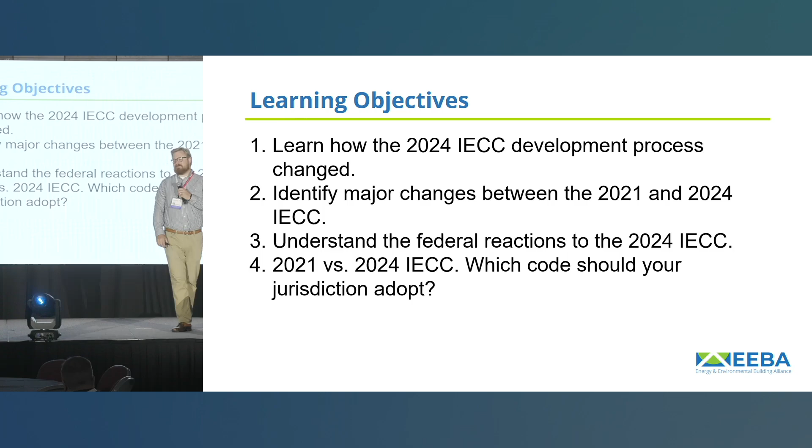It is so exciting. So key things we're going to be talking about: how the 2024 development process changed from previous years. There was a big change after the outcome of the 2021. We'll talk about that, and we'll talk through some of the major changes, not all of them, but some of the big ones for the 2024 IECC compared to the 2021.

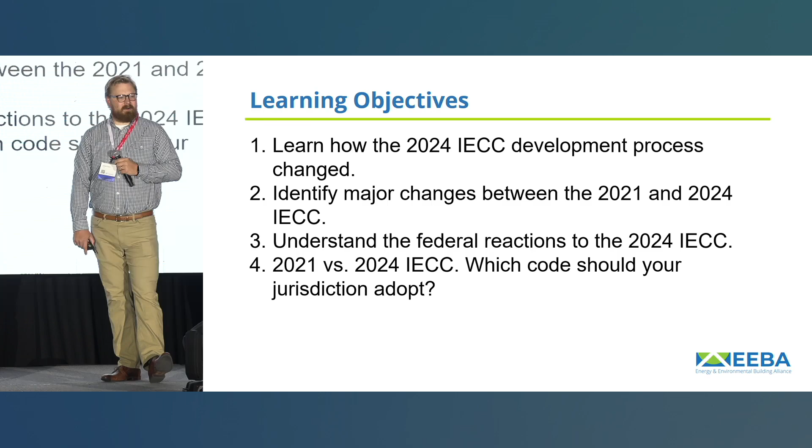And then we'll talk about some of the federal reactions to the 2024. How are programs like USDA, HUD, VA, and IRA funding reacting to the 2024? And then we're going to finish up with 2021 versus 2024. And I say versus, it's not really a versus, but it is trying to understand what's going to be best for your jurisdiction. What do you think you should be pushing for locally? Go from there.

So the 2024 is very different in a lot of ways from the 2021. One of the key changes is how it was developed. This is, in my opinion, a big pendulum swing from what happened at the end of the 2021 development process.

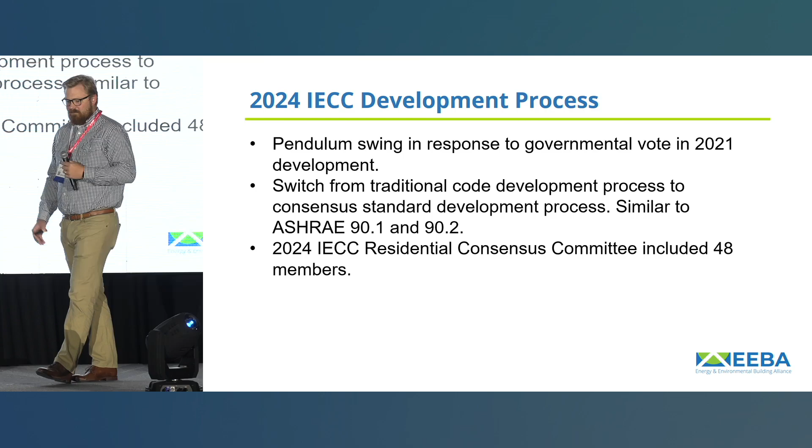This is really switching from the traditional governmental approach, where there's 2-minute testimony on code cycle or code proposals and back and forth in front of the committee, to a more consensus development standard. And it's important to note this is the same way that ASHRAE 90.1 and 90.2 are developed. So it's not that unusual for a code to be developed this way.

So in the 2024 cycle, there were 48 members on the consensus committee, and I think over 150 on the appropriate subcommittees related to that. I don't know, Robbie, were you on a subcommittee? Yeah, I was on the existing home chapter subcommittee.

Fantastic. And just to add to that real quick, in the code world, it was a pretty big change, even though it was very similar to ASHRAE standards and whatnot. But in the normal code world, you do development through the code hearings, and the code hearings, as Nathan was saying, is this 2-minute process where you put in a proposal and then you have 2 minutes to speak to it. Then people have 2 minutes to rebut, and then you can rebut once there, and you kind of go back and forth.

And it's basically up or down pretty much after that 2 minutes. It's a little bit longer process, but the consensus process is good and bad in certain ways. One is that from the bad side, it's just super time consuming versus kind of a dedicated 2-week process at the code hearings. The consensus process was going 6 months or longer.

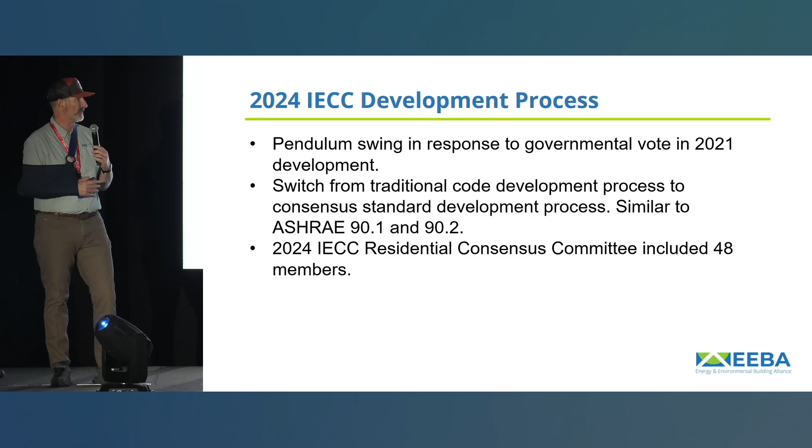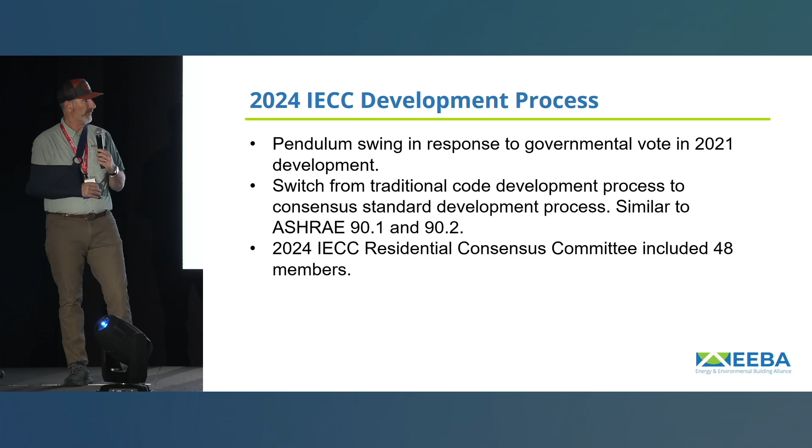With hours during the week. I mean, it was probably 8 to 16 hours a week you're dedicating to that there. So, but that was also good in some ways because proposals didn't necessarily die at the podium. They could be massaged a little bit during the process.

Yeah, absolutely. So, looking at how that process works, we're going to go high level, not into all of the details of this, but really people apply to be on a consensus committee or an appropriate subcommittee. I think there were 5 subcommittees in this last cycle. I expect there to be about the same number in this one.

During that time, ICC says, okay, start submitting proposals. We'll start gathering those together, and then that goes to subcommittees. Subcommittees do a lot of the work for the code development. They will review all of the proposals, talk them through, decide if they need modifications or changes, and then they will make recommendations to the full consensus committee.

After that, the consensus committee will review the recommendations and vote on changes. Sometimes those votes are...

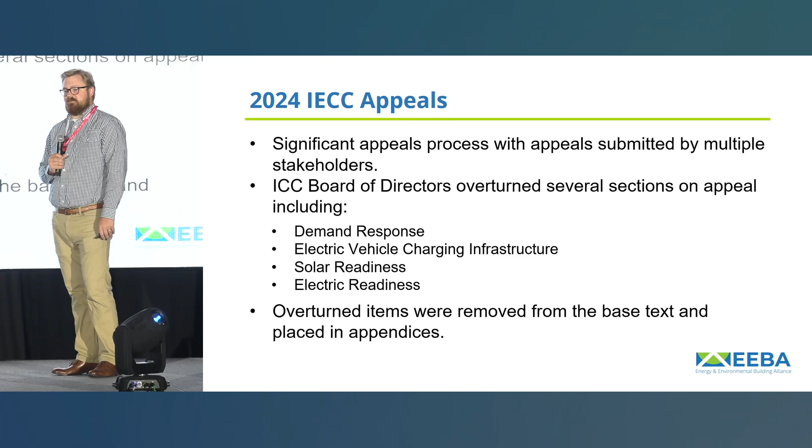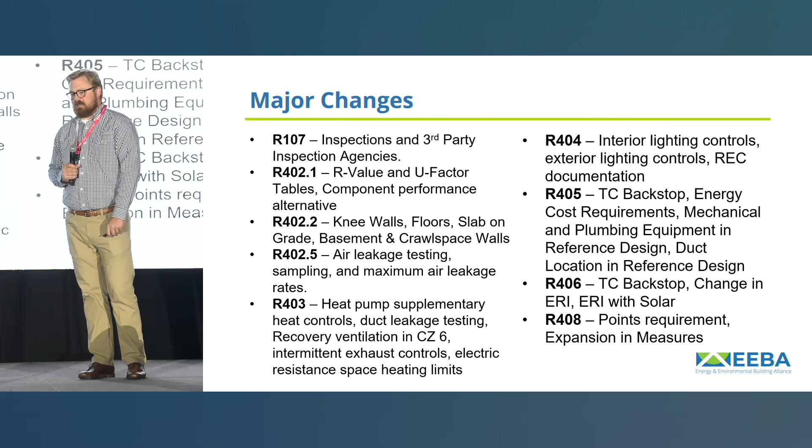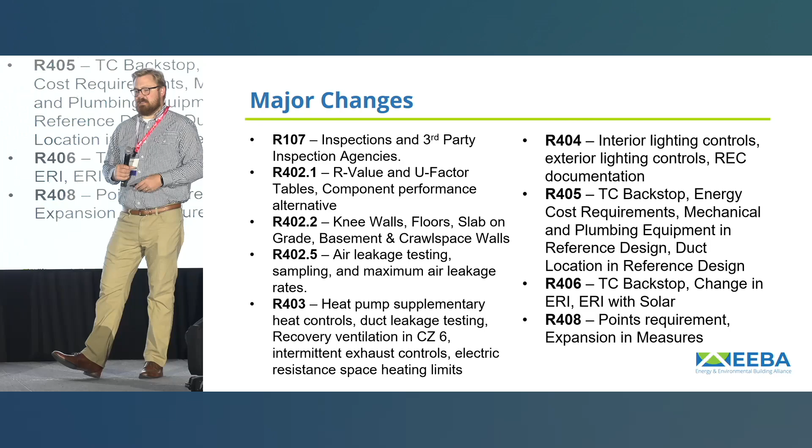So I think that's enough on the cycle and appeals. Let's talk about the changes—this is probably what most of you came here to learn about. We're going to cover a lot of the major changes, but not all of them. The 2024 code is publicly available for free online, and I strongly recommend, if your municipality is looking to adopt it, go read it and understand it a bit more. There are plenty of resources from NAHB, the Department of Energy, and other parties about these changes and the opportunities under this new code. We're going to cover some of the high-level ones. We won't be looking at things like existing buildings—I think most of you are new construction, so we'll stick to new construction and go from there.

Robbie, you want to handle these? Yeah, so the first things that changed were in the administrative chapter. A lot of jurisdictions don't actually adopt the administrative chapter, but there are some really interesting and good things in it that municipalities should consider.

The first one is with regards to inspections. If you look at the codes up until the 2024, you'll see that inspections have been framed a little differently in terms of what you need to look at from an energy perspective—like ensuring insulation is not only installed to the R value, but actually installed properly so it works and functions. So they did additional work on that section of inspections to focus more on energy, air barriers, and insulation installation.

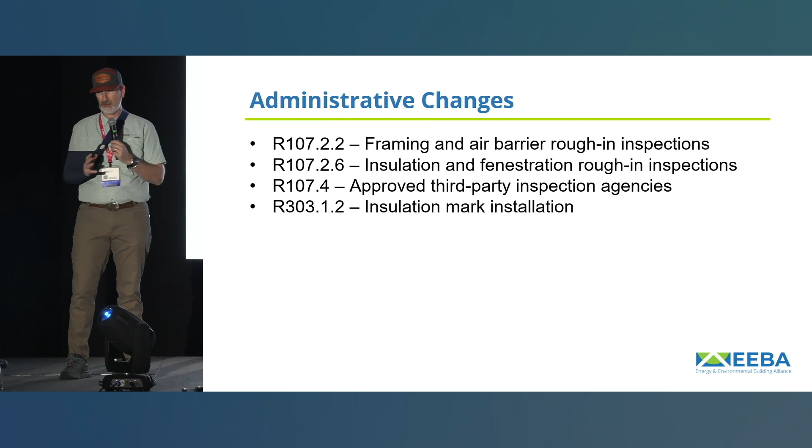Approved third-party inspection agencies is something that's been passionate for me, and I was part of the group that worked hard to get revisions in the 2024 to better clarify the relationship between the code official and an approved third-party inspection agency—giving that agency a scope of work, but also some authority to actually fail an inspection if they're being used for that. It also better clarifies the financial relationship, so it's clear the third party has the authority to work in that jurisdiction, but the jurisdiction also has the ability to say you can't work here and provide documentation for code approval if they feel there's something that's compromised your integrity and independence from the builder utilizing you.

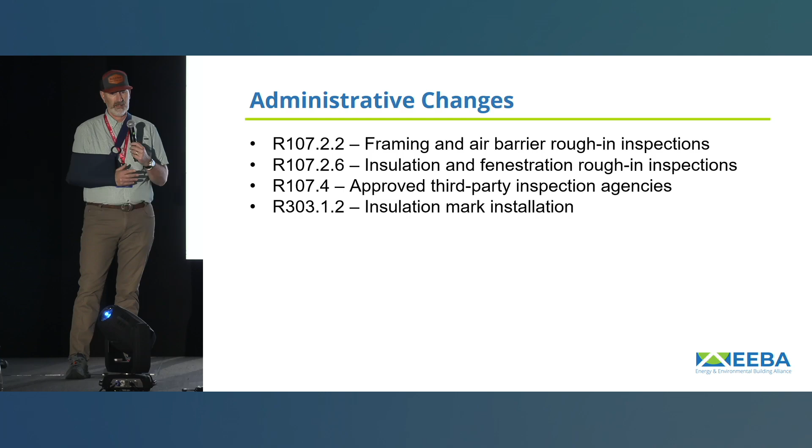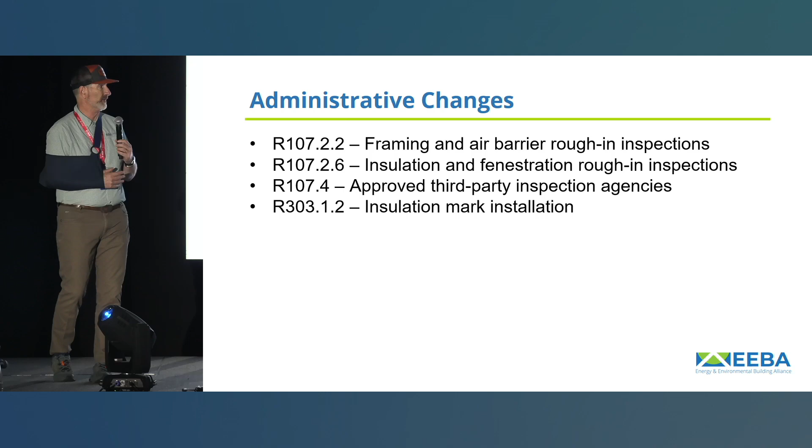The installation mark change—I think this really happened more in the 2021 cycle—addresses the problem with insulation installed that doesn't have an R value mark on it. We really have no idea what the R value is; we can make assumptions based on the density of the blow or the chemical reaction that happens, but that's it. So we're now asking that the insulator certify the R value installed and provide a certification certificate immediately after installation of the material. The hope, in the vagary of code language, is that we get better quality assurance from the actual installer at the time of installation, and that we can rely on the R values they're certifying. Thanks, Robbie.

Next big change—sorry, this is small.

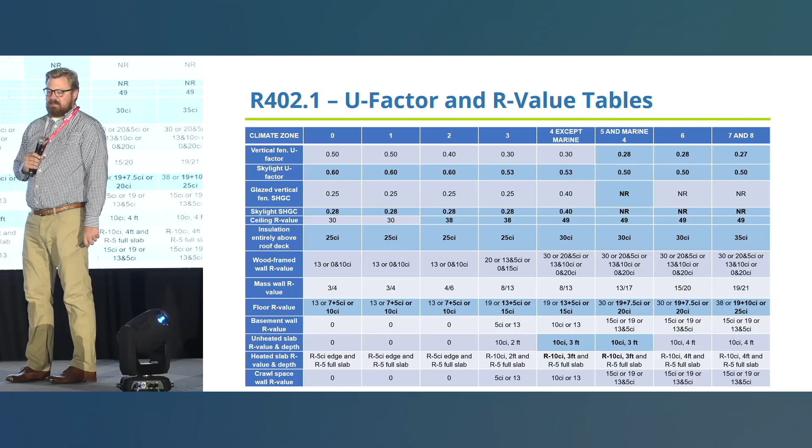There were some pretty significant changes throughout the R value tables and the U factor tables. Some of the key changes in colder climates, there was a ramping down of U factors for windows. Nothing that's going to push a builder into a triple pane, but requiring some better window technology. There was also a really great decrease in skylight U factors.

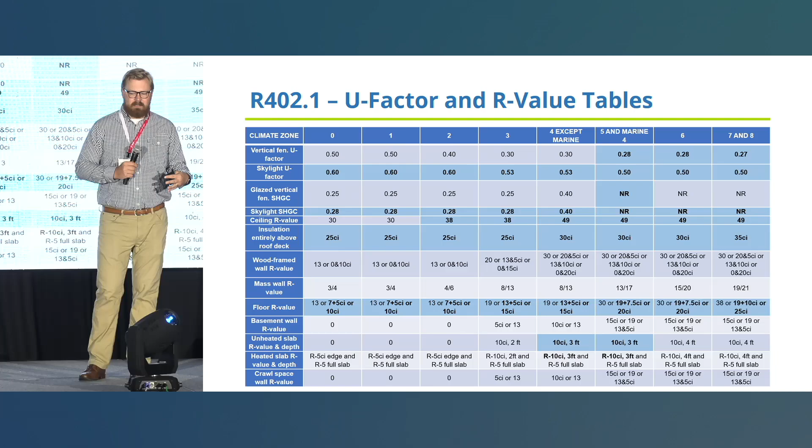Another key change is with ceiling R values. In 2021, there was a push up in climate zones 2 and 3 to R49, and then 4 through 8 went up to R60. That came back down as part of that compromise, so that is a significant change.

Another key thing that I think is great, and we're trying to recognize more about low-rise multifamily that is covered under the residential provisions of the IECC, is what happens when we have insulation entirely above deck. These values were added to this table, really trying to bring some better guidance for those low-rise buildings.

And then some of the last changes, floor R values didn't really change, but there was some flexibility added into what pathway you can choose. You can pick a cavity-only insulation option, you can pick a hybrid where you've got a little bit of cavity insulation and some continuous, or you can pick an all-continuous option. That was added throughout all of the climate zones.

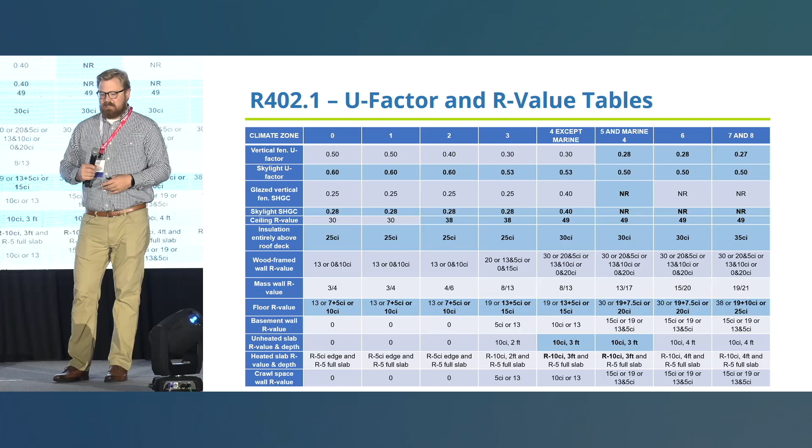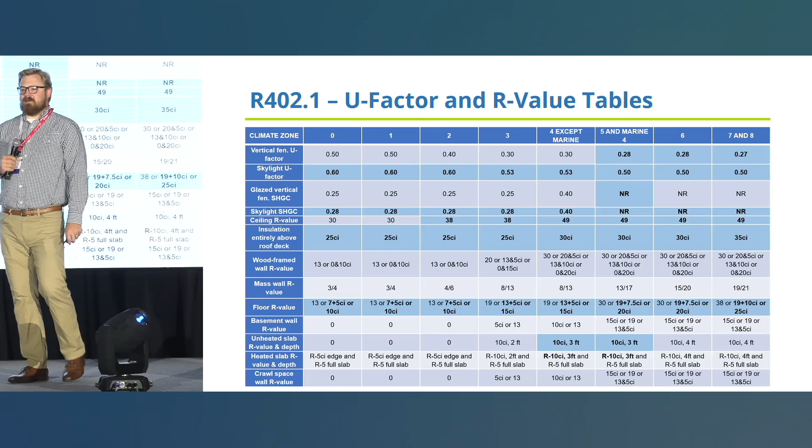And then another reduction was in the slab edge insulation. So climate zones 4 and 5, taking that from R10 at 4 feet below grade to R10 at 3 feet below grade. Again, this is our prescriptive values. I'm going to assume that most of the people in the room are following a performance pathway, so you're not always looking at those prescriptive values, but this will inform the reference home that you're comparing against.

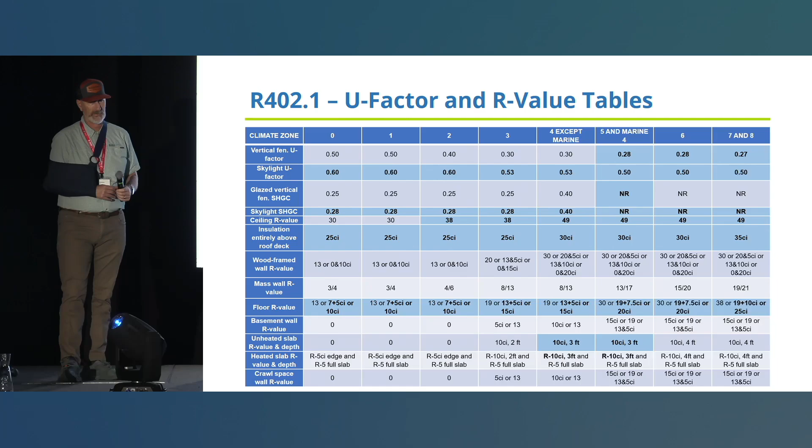The other big change, obviously, was in the structure of the table, which we should point out too, is that they inverted the X-Y axis there, so that's why it might look a little strange to you, but it ultimately makes it easier to read. I believe this is also more consistent with the commercial sections of the code, which had taken that switch previously, so this just brings some better clarity.

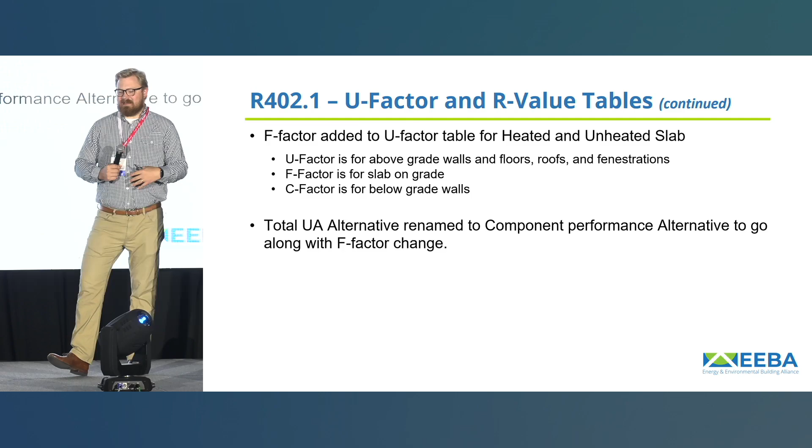Another item that you will see throughout the code is F factors are in the code now. Basically, there's U factors, F factors, and C factors. U factors are for above grade walls, but we had been using them for slab edge insulation. The change is that really F factor is the appropriate heat loss, heat transmission factor for slab on grade, so that was changed in the U factor table for the slab edge and the below slab insulation values.

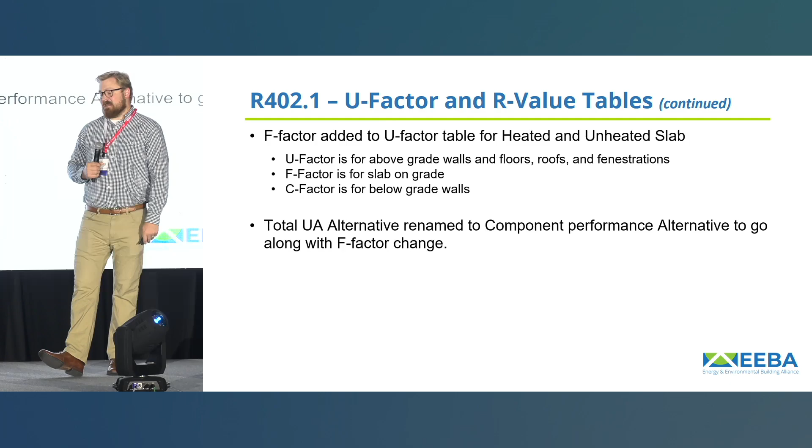And there was actually an appendix brought in that gives a lot of great information about some of these factors. Just as a reminder, U factor, F factor, and C factor are talking about basically the resistance of heat flow through an assembly of things, versus R value, which is the actual component there.

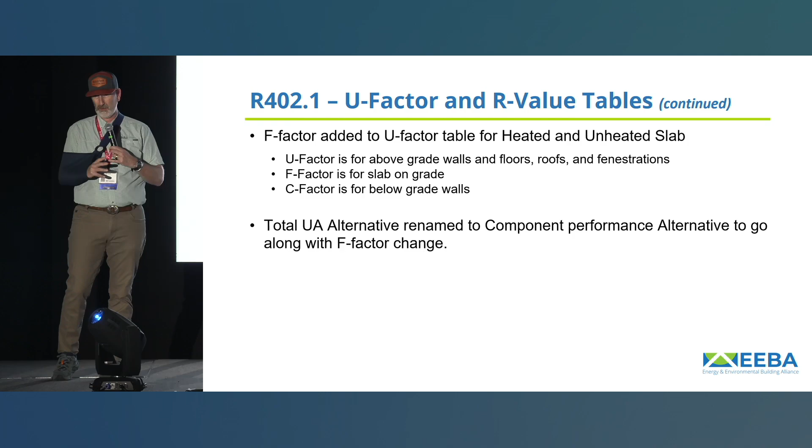This is super important because you might have noticed that if you use the REScheck software for the area-weighted U-value approach, PNNL stopped you in 2021 from being able to do slab edge trade-offs, because there was no value, no assembly value there that they could use in the U-factor table, since all the U-factors are basically populating the software modeling there. Now that ability to get more flexibility, whenever you use even a limited energy model versus the more sophisticated energy models, has been brought back into the code.

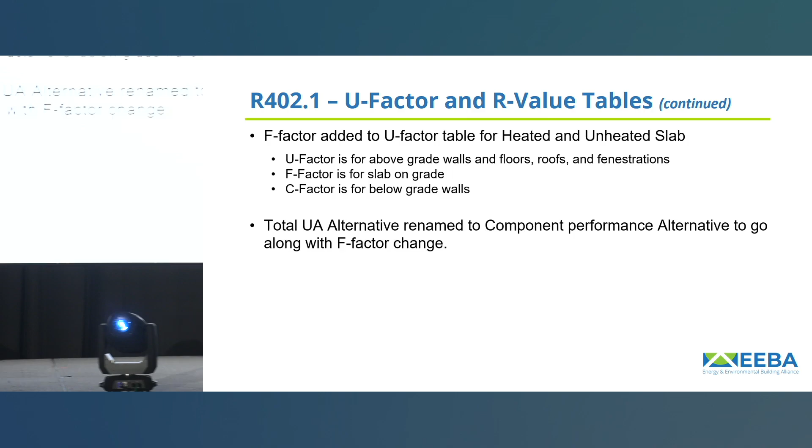And with the change and addition of F-factors, they had to change the name of the UA alternative. Since we have F-factors in there, calling it a UA is not appropriate. So the name was changed to the Component Performance Alternative, or TC, for total conductance. It's now referred to throughout the code as TC instead of UA, so you may see us talk about TC on future slides. That's what we were talking about.

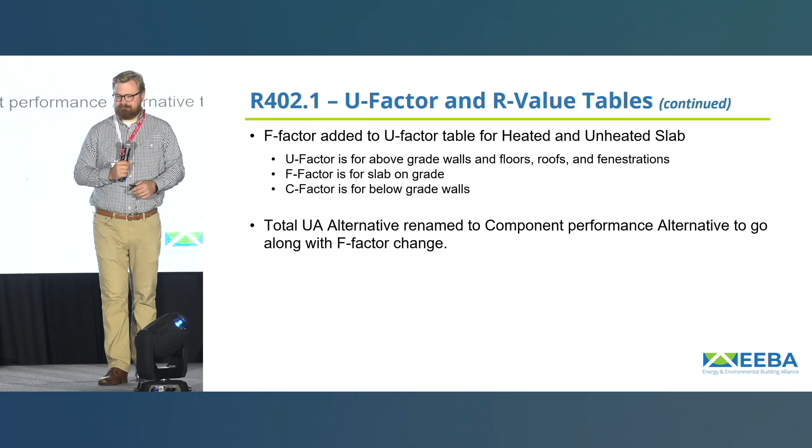Other changes that happened were changes in specific insulation requirements. It was always implied that attic knee walls were supposed to be installed like typical above-grade walls, but it wasn't really confirmed. That was a change to verify and provide that requirement, that attic knee walls need to be installed like above-grade walls.

Another change throughout that section is that for slabs, crawl space walls, and basements, there was specific language put in saying you install it this way, or you install it in accordance with your energy model—in accordance with the proposed design or rated design as applicable. So if you're unable to get insulation all the way up to the top of the slab edge, you can model it and take the hit in the model, and that meets the requirements.

There are also provisions for basement walls if you're not installing insulation all the way from the top of the basement wall to the bottom. This is something we might see with some code-minimum production builders. That is going to be allowed as long as you're performing or marking that in your model appropriately. So that's a big change.

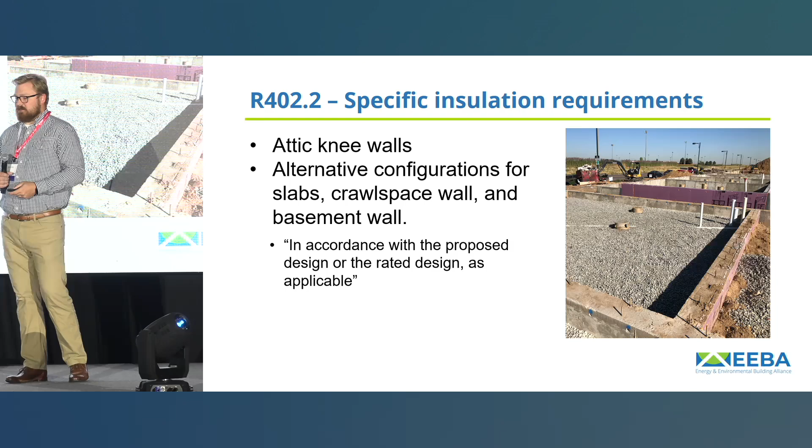I think the big thing to recognize with regards to the specific insulation requirements is that they're requirements for how you install a product or an insulation. Sometimes there's R-value and U-value mixed in, with the ability to do trade-offs utilizing the prescriptive R-value table, but mostly it's about how you install things. So when you're looking at the R-value table, it doesn't say you have to put in that R-value—you have the ability to do what we call a trade-off using an approach.

But for attic knee walls, for example, we often see that an attic knee wall is framed with a 2x4 wall, while the rest of the exterior wall is framed with a 2x6 wall, and that's perfectly fine. It just means you can't use the prescriptive R-value compliance approach—you've got to move to a different approach. I think these kinds of upgrades to the code help point those types of things out a little bit better.

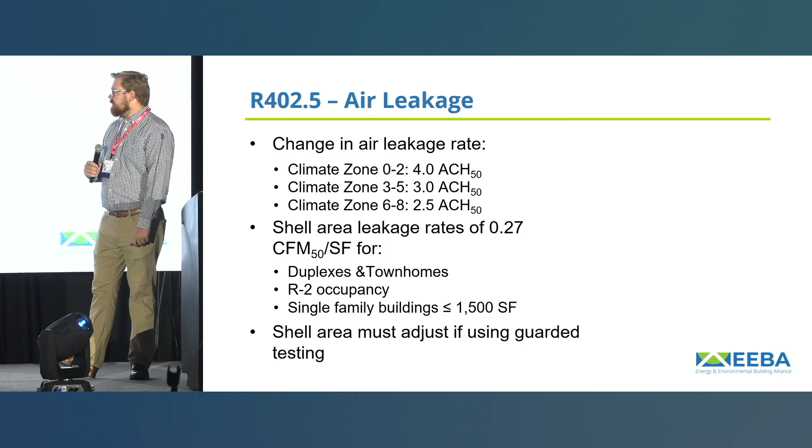Absolutely. Another major change we saw is a change in air leakage rates. For climate zones 0 through 2, it dropped from 5 ACH50 down to 4 ACH50. I think that's a very doable reduction for most buildings in those climate zones. Climate zones 3 through 5 stayed the same at 3 ACH50, but climate zones 6 through 8 dropped to 2.5 ACH50—a reduction for those colder climate zones, recognizing they have more intense heating requirements and need to be slightly tighter.

Another big change was shell area. It had been included in the 2021 code, but in some ways it wasn't well defined—how you use it, where you use it, and what your overall application of it should be. So they were very specific in rewriting that section to say how and where you use it. You can use the shell area leakage rate of 0.27 CFM for duplexes, any sort of R2 occupancy, or for single-family buildings smaller than 1,500 square feet.

They also provided clarification about guarded blower door testing, which is especially important in attached buildings. Basically, if you are using guarded testing where you may have multiple blower doors operating at the same time, that is allowed, but you need to make sure you're reducing your shell area appropriately. If you're trying to equalize units on either side of a townhome, that's allowed, but you need to pull that shell area out so you're only looking at exterior walls at that point.

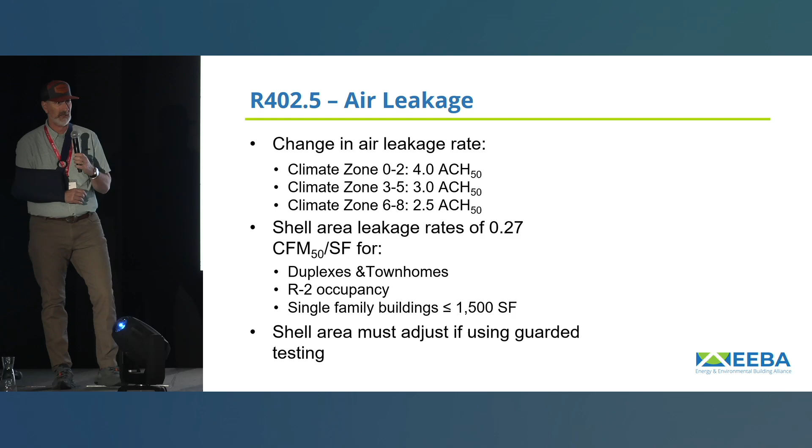In the 2024 code, they made it much more clear that there are air leakage allowances for the four different compliance approaches, so you still have, in essence, this backstop for air leakage in the performance approaches, and then you have these listed air leakage rates per climate zone if you choose to use the prescriptive compliance approach.

There were also significant changes throughout R403. This is talking about HVAC systems and plumbing systems.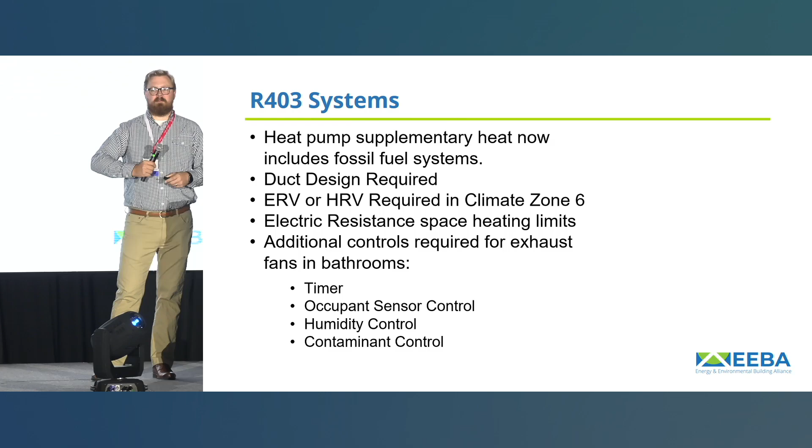Some of the high-level changes: the heat pump supplementary heat options previously only referred to electric resistance heating. It now includes references to fossil fuel systems. So if you've got a dual fuel system, it's being very clear on when that furnace or other fossil fuel system should kick in, and setting some really key limits around that.

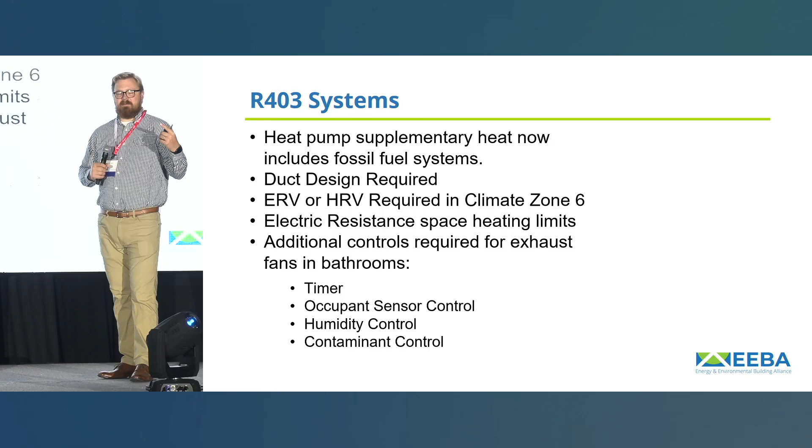Also included in previous codes, we've seen a requirement to complete a Manual J heat load calc - everybody should know that - and a Manual S to confirm that our equipment is sized appropriately to meet the load. But a big change we're now seeing is the inclusion of Manual D, having a duct design as part of your overall code compliance package, so that your system can actually distribute the heat appropriately and handle this.

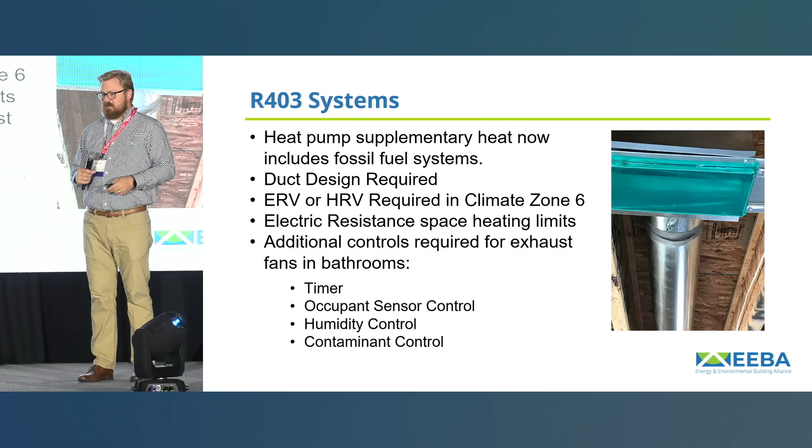Another big change - oh, and I have pictures for all of these, sorry. Sorry, this is one of my joke pictures.

We started installing ERVs at one point, and I come in and see this nice control wire, and I'm looking at it, and I see ARV, and I'm like, what are they talking about? They just misheard us pronounce ERV.

So ERVs are now required in Climate Zone 6. Previously, it was only required in Climate Zone 7 and 8, so that was brought down to Climate Zone 6, really expanding the area where ERVs and HRVs are going to be used.

And then two other changes: putting limits on electric resistance space heating. So saying that you can only put so much electric resistance unless you also add in a heat pump. So a big opportunity to reduce that low efficiency heating.

And then there was requirements for controls for what's listed as intermittent exhaust fans. These are fans used in bathrooms and other wet areas, but putting requirements to say they either need a timer, occupancy sensor, humidity control, or contaminant control. So go talk with some of our great sponsors here about what that would look like to implement on your fans. Robbie, anything else on this?

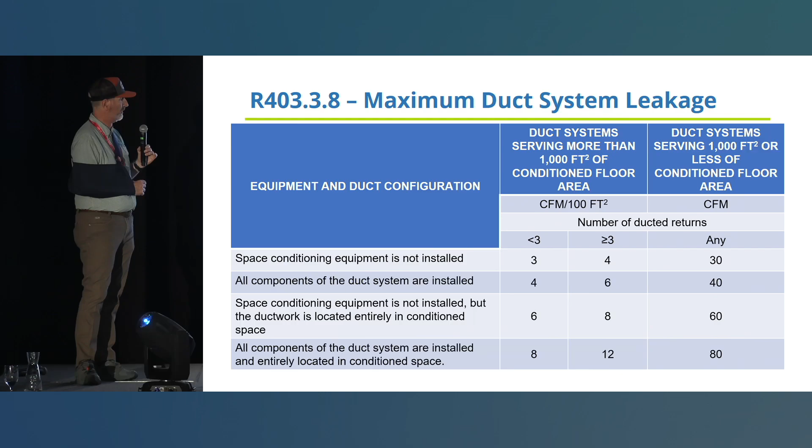I'll just add, because I'm particularly passionate about duct leakage: in the 2021 IECC, you'll see that you have to test ducts for duct leakage regardless of where the ducts are located, which is new to that code. But you do get some allowance if all the ducts are located inside the conditioned space, and those allowances have been added to this table, expanded a bit to make it more clear that yes, you still have to test the ducts regardless of where they're located, but they get tested to different leakage targets, in essence, that are listed in this table. That's new to the 2024.

I think a big piece on this table is this far column. Any of you who have done duct testing on ADUs, on apartments, on small buildings below 1,000 square feet have felt the pain of trying to hit a requirement of 4 CFM per 100 square feet when you only have 750 square feet - that gets really difficult. So they've changed this, instead of being based on the square feet of conditioned area, to just a hard target for these smaller units. I think that's going to provide some good flexibility while still keeping good stringency around all of this.

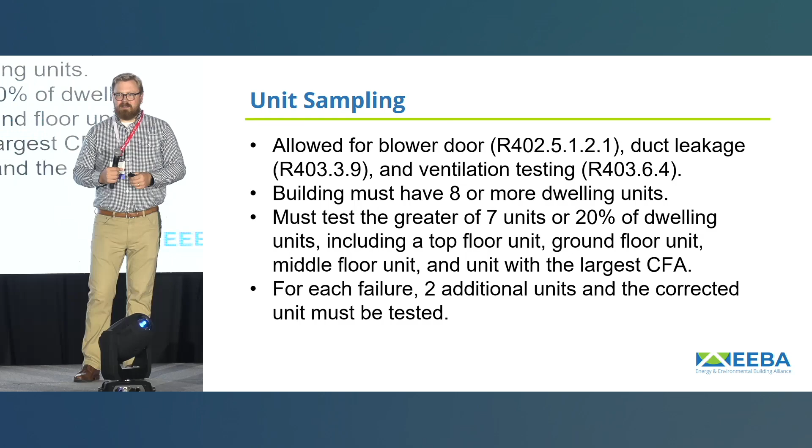Another option brought into the code - valuable for any multifamily builders in the room - is the opportunity to do unit sampling for your testing. There are three tests that have to be done on every home: blower door test, duct leakage test, and a ventilation test. What the code is allowing is for buildings with 8 units or more, you can start to look at sampling. It requires a minimum of 7 units, so if you have an 8-unit building, go ahead and test that 8th one - there's no point in not testing it. So it sets requirements on how you should test, what percentage of homes you should test, and what to do if you have a failure, like adding more units into your sample. This is consistent with some of the language RESNET has been allowing around sampling for HERS rating, and I think limiting it specifically to attached units that are larger makes more sense than allowing this in single family.

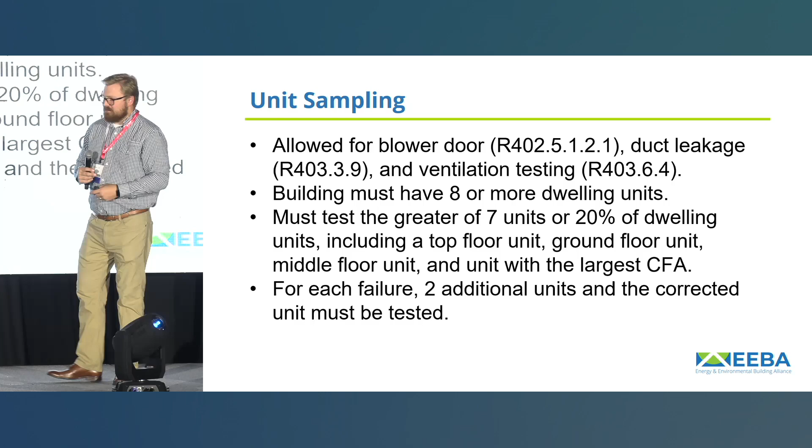I don't know if everybody's aware, but in the 2021 IECC this is when ventilation testing got into the code, or was added to the code. So you're talking about measuring flow rates for whole house controlled mechanical ventilation, spot ventilation in bathrooms, kitchens, and laundries, and also ventilation of kitchens through kitchen hoods.

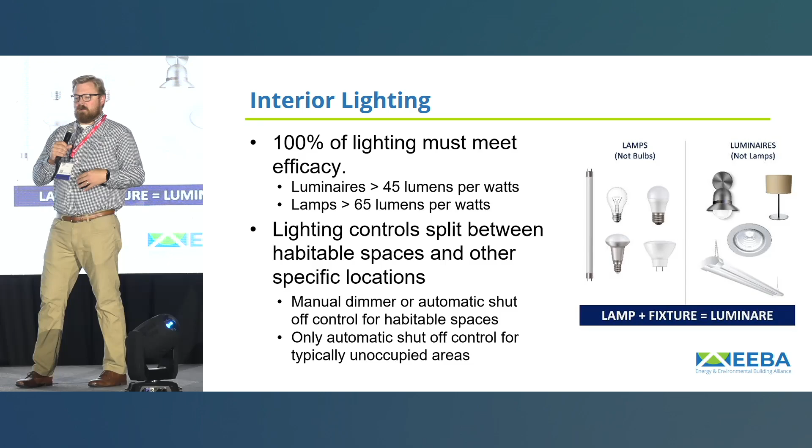So other key changes are around interior lighting, and then we'll get to the end of some of our prescriptive requirements. The code changed the language to say 100% of lighting must meet a certain efficacy. For luminaires — for the non-lighting designers in the room, that is what I would call a fixture — they have to have an efficiency of 45 lumens per watt or greater. And for lamps, what I call a bulb, but lighting designers insist they're called lamps, they have to be at an efficiency of 65 lumens per watt or greater.

There was also, in 2021, a requirement for interior lighting controls that came into the code. This was changed in 2024 to specify what types of controls should be in what locations. For most locations throughout the home, they're saying a manual dimmer or what's referred to as an automatic shut-off control — a fancy way to say an occupancy sensor that turns off when you're not in the room. A dimmer or occupancy sensor is appropriate for most spaces, but there are specific areas that may typically be unoccupied where only an automatic shut-off control is allowed. This includes a garage, laundry room, utility room, or unfinished basement — areas you may not typically go into will require these automatic shut-off controls.

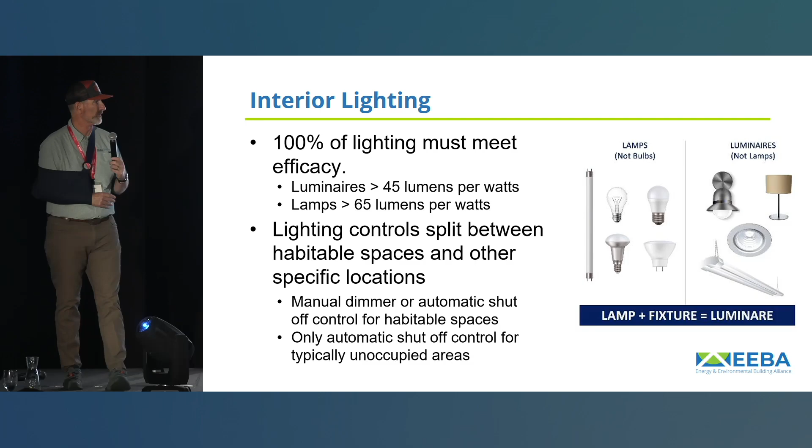Because the residential side deals with single-family homes, duplexes, townhouses, and multifamily that's 3 stories or less, this section might look a little daunting, but when you read it you have to understand what's being required for more of the multifamily, stacked multifamily, versus what's required for detached single-family houses. So it's not quite as daunting as you might think. You'll see a table that came over from the commercial section for those R2 occupancy buildings, but know that's just for multifamily — it's not a requirement for single family.

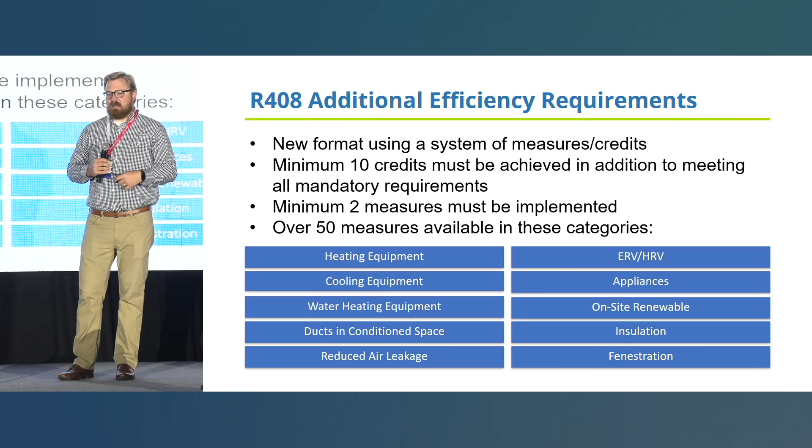And then finally, there was a big change in section R408. This came about in 2021 as an additional efficiency measure system. There were 5 measures, and you went and picked one — that was your option to do throughout the code process. This has changed pretty significantly under the 2024 code. It changed from an individual measure selection to a credit system.

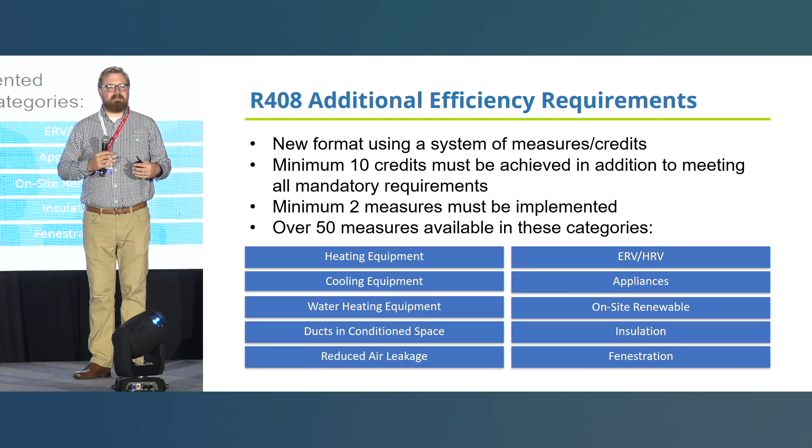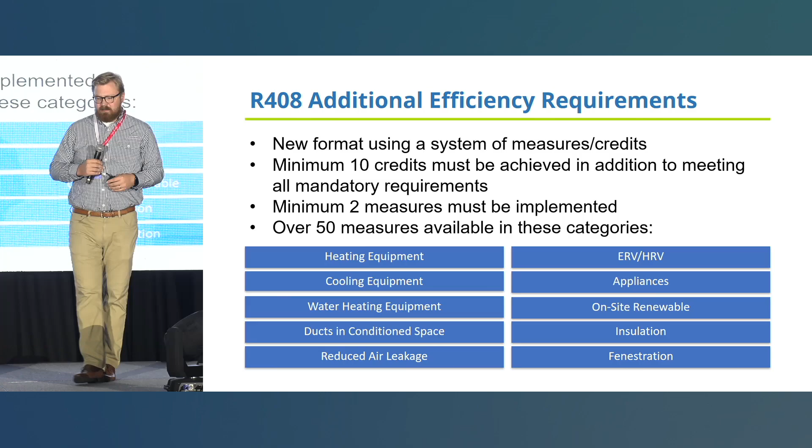So there are about 50 measures, a little over 50, that you can select from. Each of them has a different point value based on the credit, the specific measure, and the climate zone it's in — I'll show a sample of that table in a second. The requirement for most homes is you have to get a minimum of 10 credits, and that has to come from between 2 measures — so you can't just pick 1 measure, you have to pick 2 and get all of them. Some areas it looks at include your equipment, whether heating and cooling equipment or water heating, and there are a lot of opportunities around ducts in conditioned space to get significant credits. Air sealing, ventilation, and renewables are all options under the code.

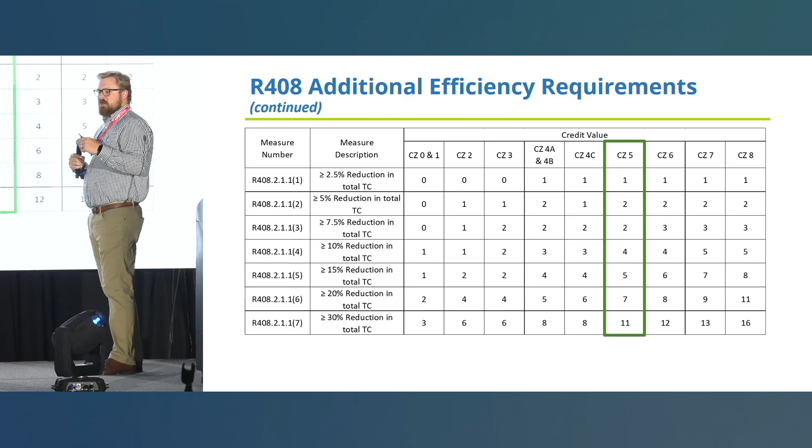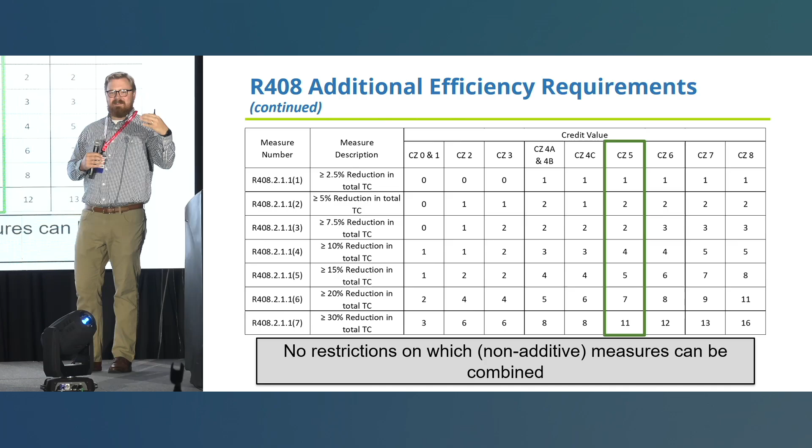This is an example — this is the very top of the table. You can see you can get different credits based on your percent reduction in total TC, which was formerly known as total UA. So you have options to get points throughout all of these, and depending on the credit, a lot of these can be combined. Some of them are not additive with each other, like these TC measures, but you can't get credit for being 2.5%, 5%, and 7.5% above code — you can only get one of those.

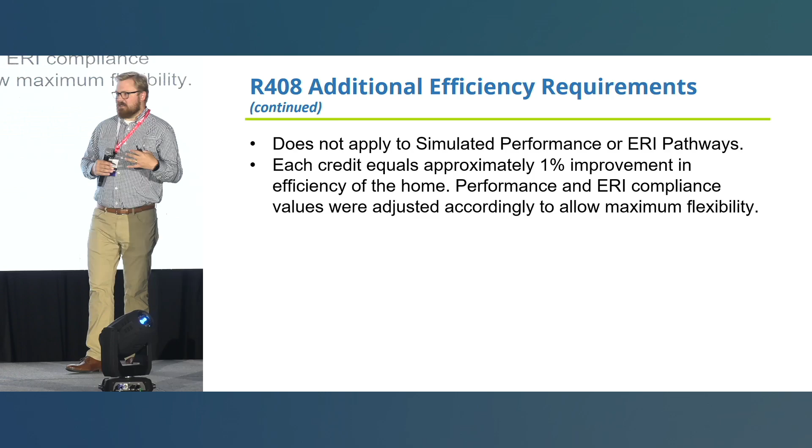The last thing to say about R408 is that this only applies to the prescriptive code section — it does not apply to the simulated performance or ERI pathways. The way this was implemented is that when you look at these credit tables, each credit is about 1% improvement in energy efficiency, with some rounding going on. That allows some comparison to the efficiency requirements in the performance and ERI paths, so those requirements were adjusted appropriately. In 2021, there was some confusion on how to implement the additional efficiency section in a modeled pathway, so this really helps that out and allows for different flexibility options under the prescriptive path, while also giving clarity for the performance pathways.

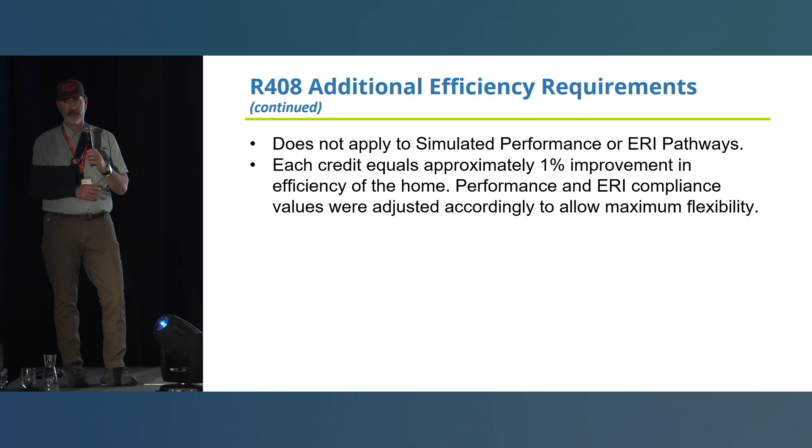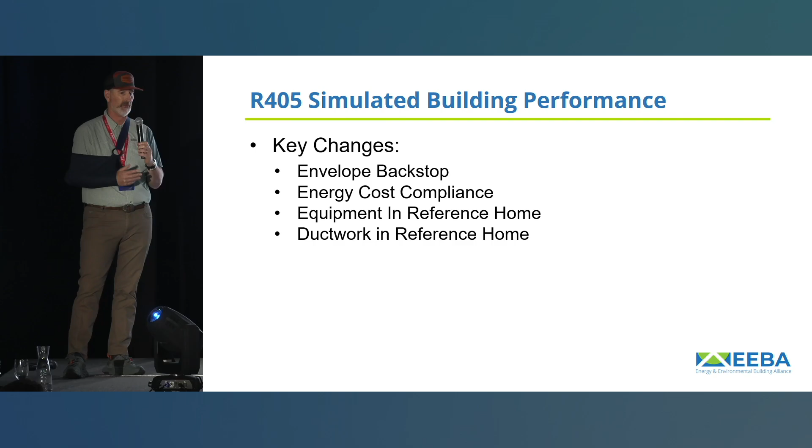And you'll see in the performance pathways that they have added these things called backstops. So in the performance path, there's an envelope backstop that ensures you have a sound building thermal envelope before you take into account renewables or other things that can swing depending on the pathway you're using.

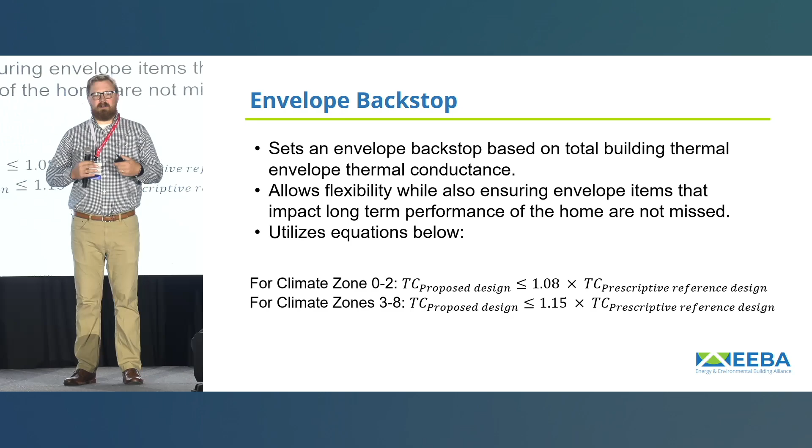Robbie mentioned backstops. Key thing is that they set a thermal backstop based on TC, the thermal conductance. So for climate zones 0 through 2, your proposed design has to be better than or equal to 1.08 times the prescriptive reference, so 8% over that. And in the colder climate zones, that's at 15%. This allows some flexibility, but also ensures these long-term durable performance aspects of the home are not going to be missed.

Real quick, I remember what I was going to say regarding the additional efficiency options and the table. If you haven't looked at the 2021 code, that's when that concept first got in. In essence, there are substantial diminishing returns to just increasing R-values over time. I think we can still get some benefit from lowering air leakage and those types of things, but there's a desire to continue increasing overall efficiency of the home, so the approach of additional efficiency packages came into the code starting in 2021.

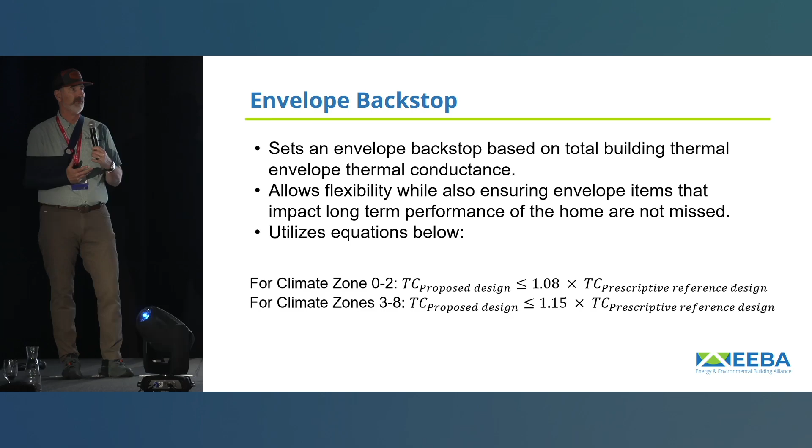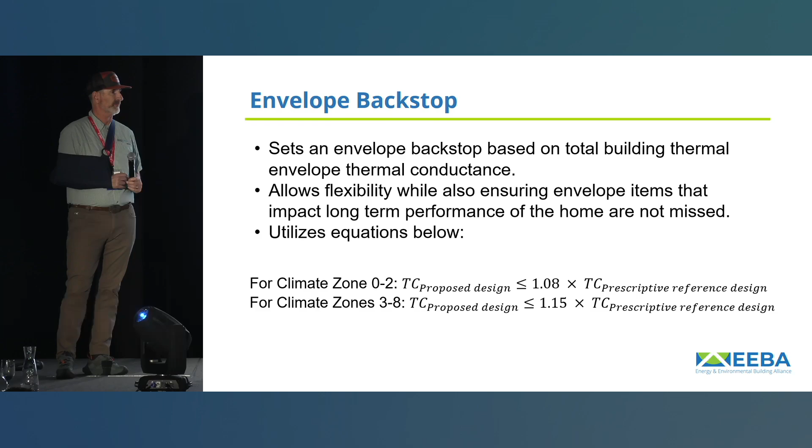Roughly, those packages are equivalent to about a 5% increase in efficiency. You can see the options have been expanded much more in 2024, and now they're looking for roughly a 10% increase, which is roughly equivalent to what's going on with these backstops. For 2027, I think one of the big debates will be what's the next amount of points - is it 15? Is it 20? What makes sense, and what can we cost-effectively do? So that's a key opportunity to increase efficiency of the code through these R408 measures - can we expand the table, include more measures, and look at different credit amounts?

Another key change - if you're familiar with the performance path, in previous code cycles you needed to be at or better than the cost of the reference home. This has changed under 2024 for several reasons: one, to increase efficiency, and also to put mixed fuel homes and all-electric homes on a more level set. So it's requiring that you be at 80% of the cost of the reference home for mixed fuel and 85% for an all-electric home. It also includes a bump of an additional 5% if your home goes above 5,000 square feet - and this is not 5,000 square feet of conditioned space, this is 5,000 square feet of living space above the grade plane. That's new phrasing brought into 2024 to look at this, so you wouldn't be penalized for things like unfinished basements that are maybe in conditioned space but not above the grade plane or not typical living space.

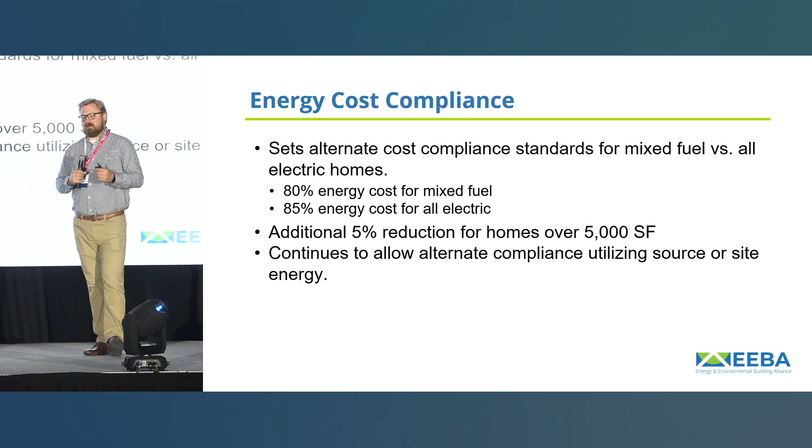Yeah, so again, looking at a typical report, you might see that you are at or better. Now it's trying to get to that 80 or 85%.

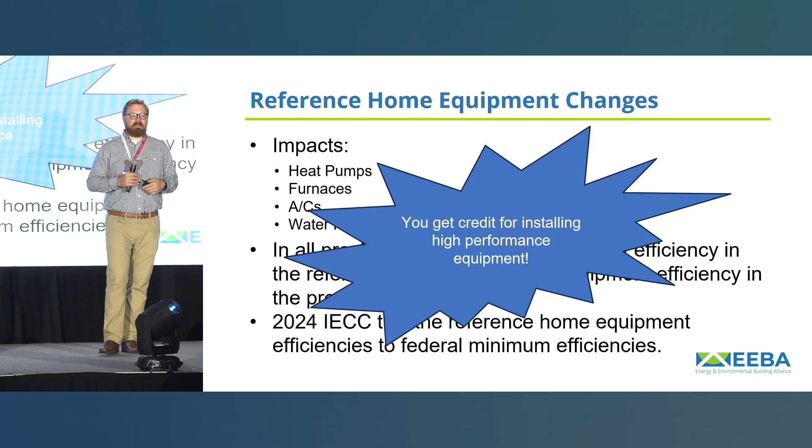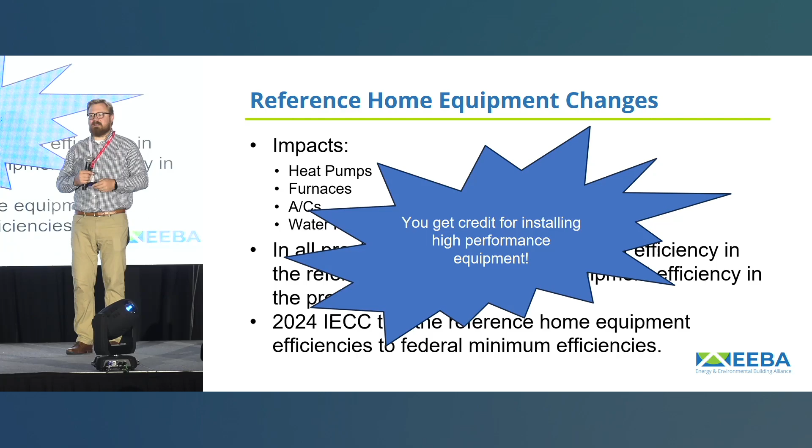Basically, another big change in the performance path is that the reference home has changed pretty significantly. They looked at all the typical equipment - in previous versions of the code, the reference home was based off the as-designed equipment. That has been changed to the minimum federal efficiency requirements. So the key takeaway is that you can now get more credit for installing higher performance equipment - you can make better trade-offs around equipment than you could in previous code cycles. I think we're still trying to see how this is going to impact the reference home and modeling, to see where everything shakes out. I'm looking forward to software providers getting out new versions of the code so we can start looking at that.

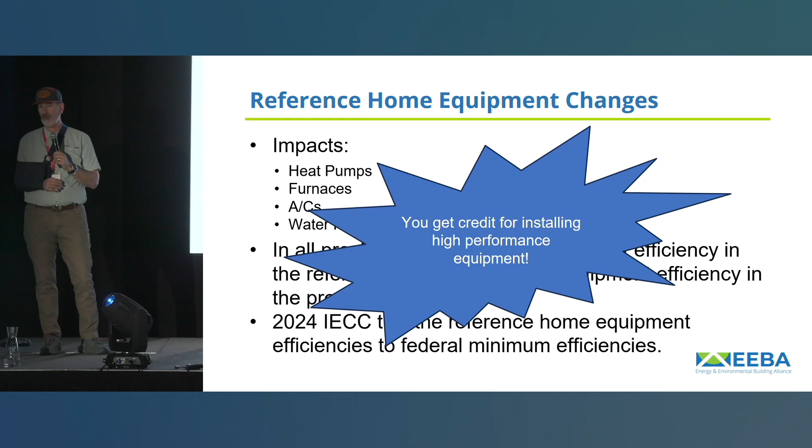I think that's going to be crucial. I used to always say that the simulated building performance approach was the most flexible approach that builders could use to get code compliance, and we just don't know now the effect.

So again, there's some increased flexibility with these changes, but we also just don't know where we're going to end up. Another change, we talked about equipment being changed in the reference home. They also changed ductwork in the reference home. So what they've done is set standard duct locations based on your foundation and number of stories. If you're slab on grade, one-story building, the assumption is that 100% of the ductwork is going to be in that unconditioned attic. If you go up to a two-story, it's assuming that about 25% is going to be in conditioned space and 75% is going to be in the attic. Again, the key opportunity is that you can get credit for bringing ducts into conditioned space and improving beyond what's listed in that reference home.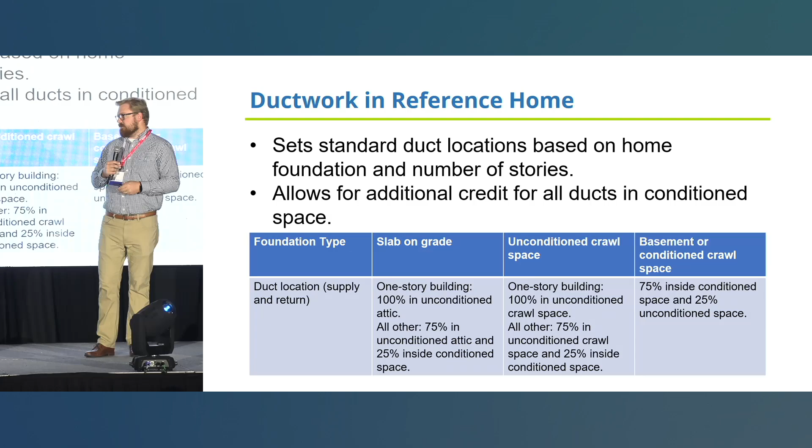So again, we've talked about performance path. Let's talk about the energy rating index pathway. Key things, they have included the same envelope backstop as was in R405. It's that 15% TC. And then they also removed, I think, a really important change. There was alternate ventilation requirements for what I would refer to as the IECC ERI versus the HERS ERI that was listed in ResNet 301. They've removed that change, so there's more consistency between a ResNet HERS index and an ERI that you would calculate for the energy code.

But remember that those two numbers, there is a separate IECC Energy Rating Index number for the same house. If you were to do a ResNet HERS Energy Rating Index, those two numbers will never be the same. They've gotten a lot more close, but because of the code basically referencing a specific year of the ANSI 301 standard for how you generate an energy rating index, and ResNet being on a continual pathway of development and adoption of the standards, they will never be exactly the same.

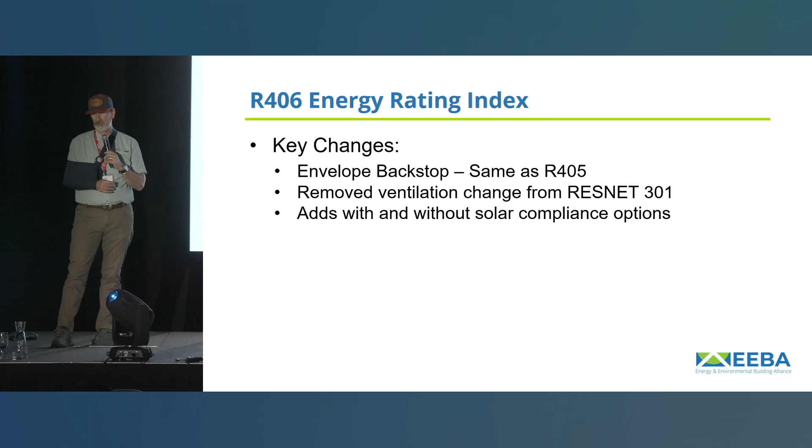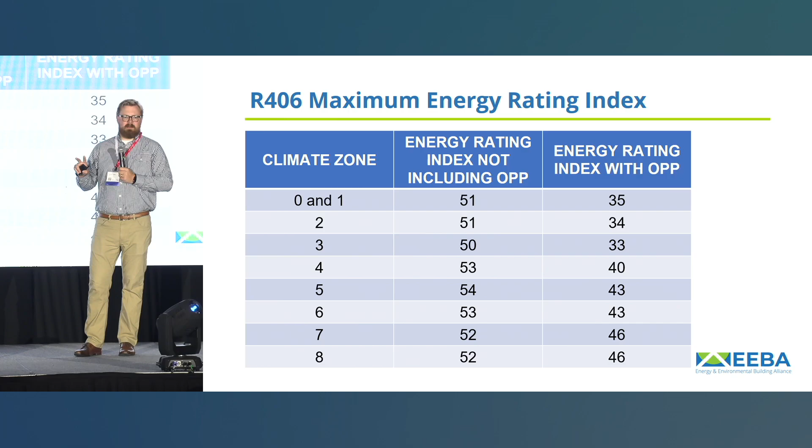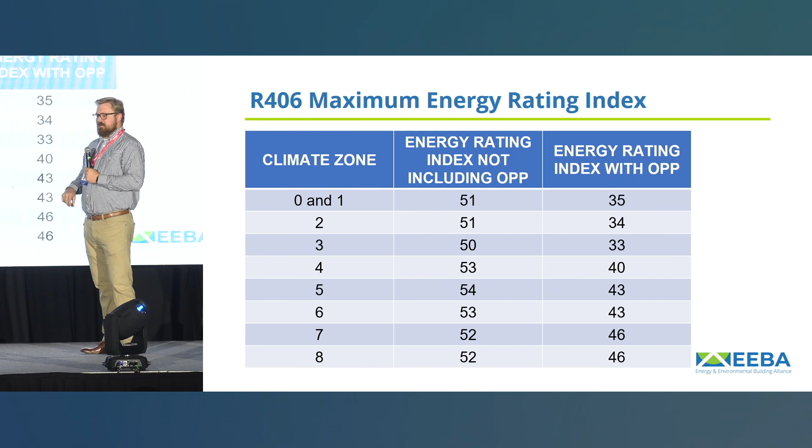Then another key change was changing to this energy rating index table. So basically, in 2021, there was an option to include solar in your ERI, but it was a little confusing, and how that was supposed to be implemented wasn't always the most clear. So what was basically changed in 2024 was to say we're going to have two metrics: one ERI if you're not including on-site power, and one if you are including on-site power production. So you'll see these higher metrics for not including solar, lower ones for including solar. And you are also allowed, if you have solar on the home but are not meeting this lower energy rating index, but you are meeting the higher one, you can just model without your solar. So there is that flexibility throughout.

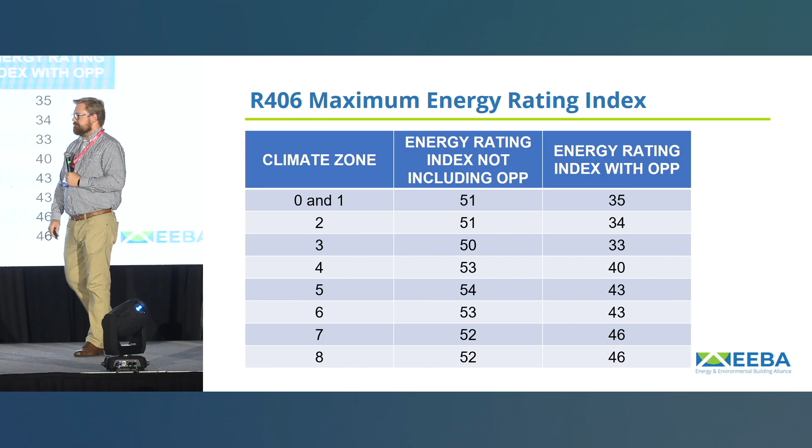So solar is the biggest thing that can swing the energy rating index. And when I first looked at this, I had forgotten about the envelope backstop. The code is always trying to protect the building thermal envelope. And if you just look at this table without understanding the backstop there, you might think you could build a house that scored maybe 100 on the scale, equivalent to the 2006 IECC, and put some solar on it and drive it down to, in climate zone 5, a 43 for example. You could do that pretty easily to get that score, but you still would not be in compliance with the code, because the code is always trying to protect the building thermal envelope, so you have to take into account that thermal envelope backstop, that additional 15% UA, or TC I guess now, that they're trying to impose on this pathway.

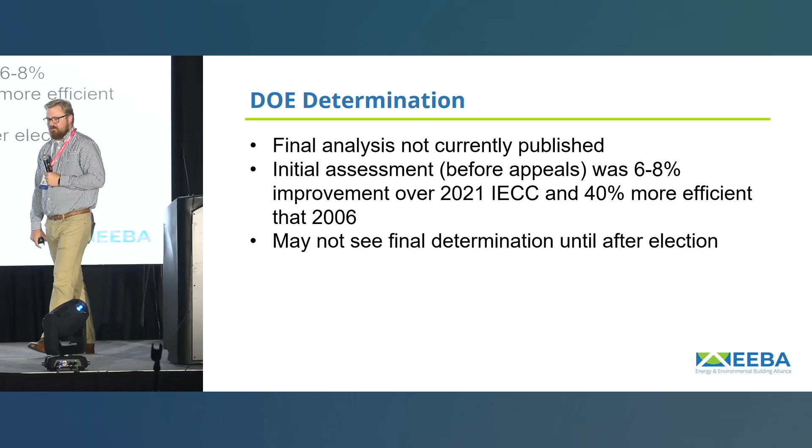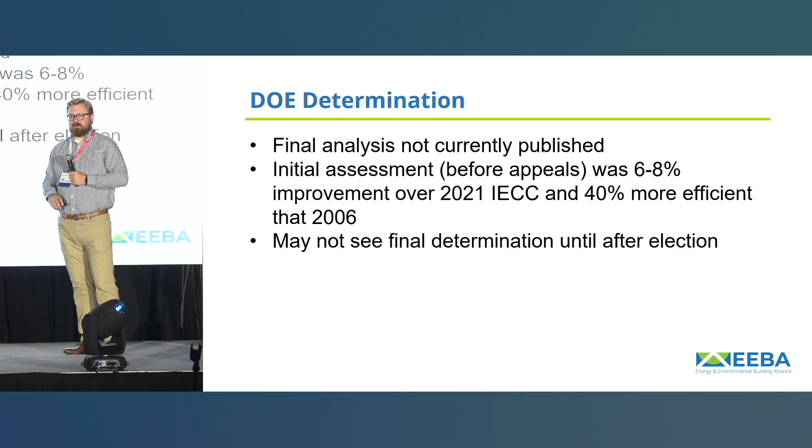Yes. So next, let's talk a little bit about how federal programs are reacting to the 2024 code. What we've seen from DOE, there's not a final determination about this. Some of the initial assessment, and again, I believe this was before the appeals occurred, was that this code was about 6 to 8% more efficient than the 2021. What I've seen is that the final analysis has not been published, and we don't expect that until after the election at the earliest. So it's still going through review, and hopefully we will see what this determination looks like in the future.

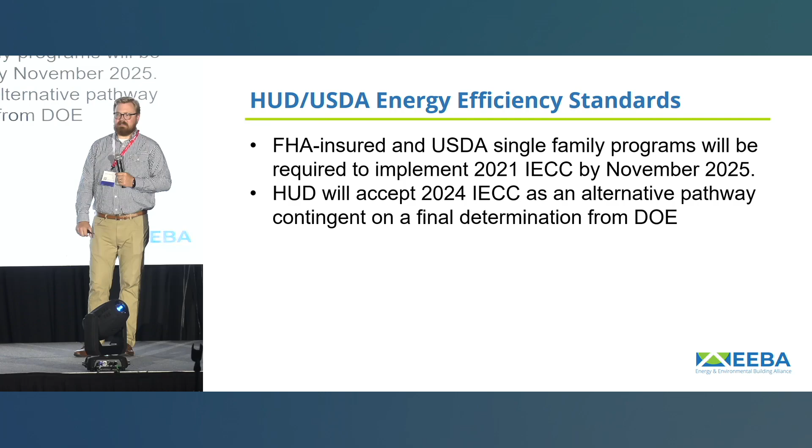That determination is important because it also impacts the HUD and USDA energy efficiency standards. So for the FHA insured and USDA single family home programs, there's a requirement to implement the 2021 IECC by November 2025. HUD has said that they will accept the 2024 as an alternate pathway contingent on that final determination. So we still need DOE to complete that determination before the 2024 can be accepted. So that's one federal program that we're looking at and trying to understand. The other piece is IRA Energy Codes development funds. Where are those going?

When the 2024 came out, they did update their requirements for application to include the 2024 as a qualified code. This is before the final determination. They're saying already, we believe that this is going to be as efficient as the 2021 or more efficient, so it's going to be a qualified code.

In that bucket of $1 billion of funding for energy code implementation, there are two key pathways. There is formula funding. This is pretty simple: if your state is on a pathway to implement a more advanced energy code like the 2021 or 2024, and they apply for that funding, they will get it, as long as they can prove they're on a pathway to implementation. But the formula funding will only allow adoption with a set list of approved amendments, so it won't allow any trade-offs. So if your state or local municipality is amending the code to have strengthening and weakening amendments, you may not qualify for that formula funding.

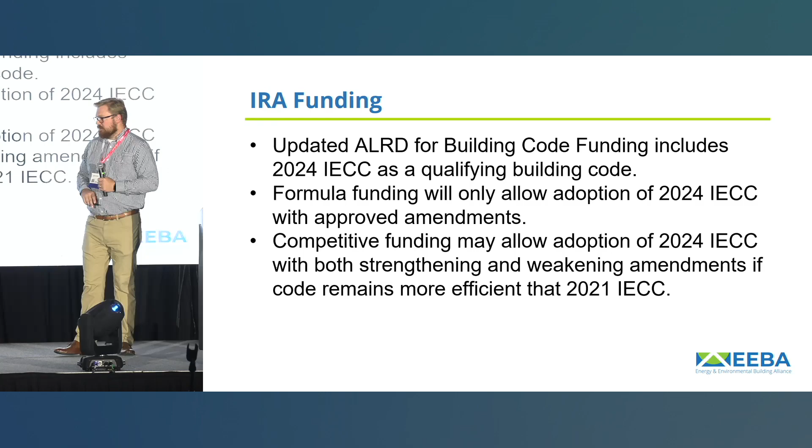But there is a smaller bucket of funding that is the competitive funding. That also will allow the 2024, and you can have a combination of strengthening and weakening amendments as long as it is still proven to be more efficient than the 2021. So this is an opportunity for states to get some funds to implement better, more stringent codes, but it is very specific on how you can do that and what codes are going to qualify. But we are seeing that they're reacting to the 2024 already.

Finally, let's talk about 2024 versus 2021. What code should your jurisdiction adopt? And this isn't really a versus, it's really a what do you think is going to work best. And so these are the key things that I would suggest to anybody looking to adopt either of these codes.

Look at your climate zone. There's some climate zones where I believe the 2024 may be more favorable, specifically climate zones 4 and 5. There's some carve-outs for those climate zones in particular that may make it easier to comply.

Understand your local construction practices. What are you going to be able to execute on well in that area, and what do these codes require? If you think you can air seal really well, you can get some significant credit for that under the 2024. That might be a good option.

Also look at your compliance pathways. The majority of builders throughout the country are still stuck on the prescriptive path. That's what they use, that's how they comply. There are opportunities to push them towards a performance pathway or a modeled pathway, but that's going to take time.

And then finally, look at whether your local municipality adopts things unamended. Do they say, nope, we want to keep the stringency of the code as written and make it work as written? Or do they include some significant amendments? And you need to understand how that's going to impact the code.

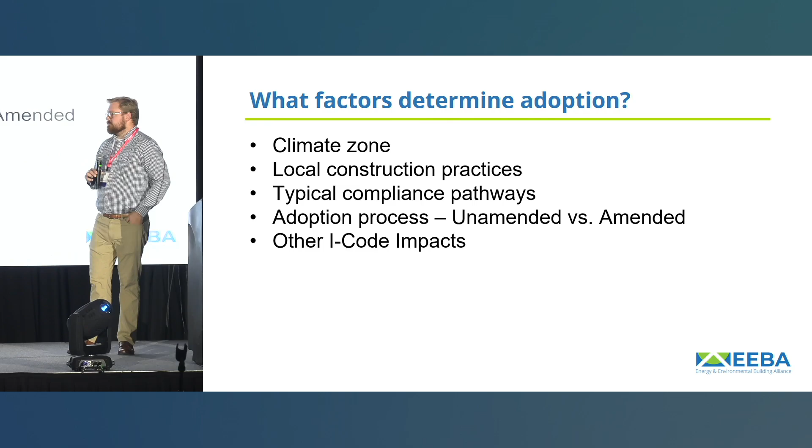So I think with that, we're going to finish with pros and cons of what we think the pros and cons of each of these codes are. I think it's really not a versus, but Robbie, you want to take 2021 and talk about some of the benefits you see? Sure, I think I want to start out a little bit broader, though.

Because the codes in general, the biggest thing that I kind of rail against when I hear it, and I hear it unfortunately all the time, is that when you're building to the code, you're building the minimum worst house that you're legally allowed to build. And we really need to change our perception of codes, because if you build a house to, even from the 2012 on, and you actually build it to the code, you're going to have a well-performing house.

You see in the presentations from Dean Gamble and other government programmatic building programs that the baseline for those programs is the code, R-values and whatnot. So we have an understanding, they're going beyond that, but it's basically an understanding that minimum isn't a bad word. Minimum doesn't have a positive or negative connotation.